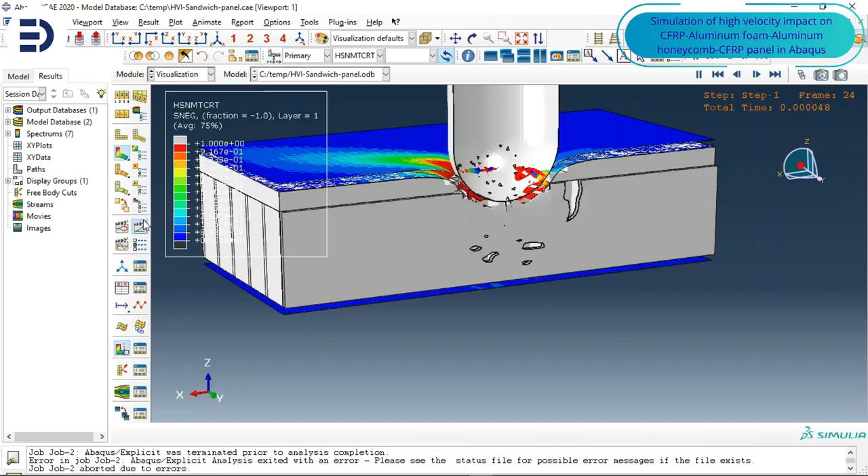Composite materials are engineered materials made from two or more distinct constituents, typically a reinforcing phase—fibers or particulates—embedded within a matrix phase, which can be polymer, metal, or ceramic. The goal is to combine the strengths of each phase to achieve superior mechanical, thermal, and durability properties that cannot be obtained by the individual components alone.

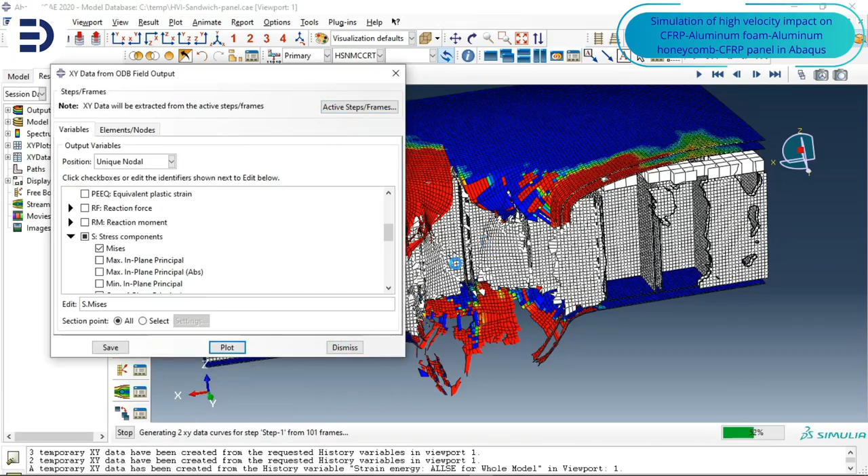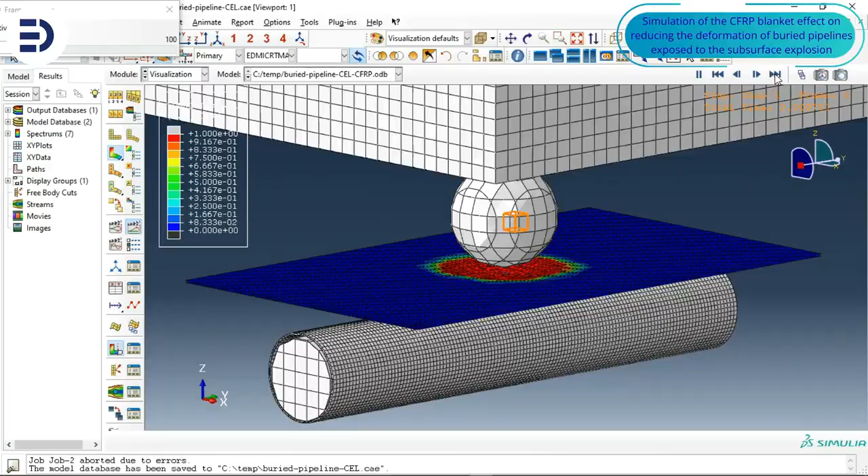Fiber-reinforced polymer (FRP) composites are the most commonly used class in industries like aerospace, automotive, civil engineering, sports equipment, energy, and marine structures. FRPs encompass a broad family of advanced materials distinguished by the type of reinforcing fiber embedded within a polymer matrix, most commonly epoxy.

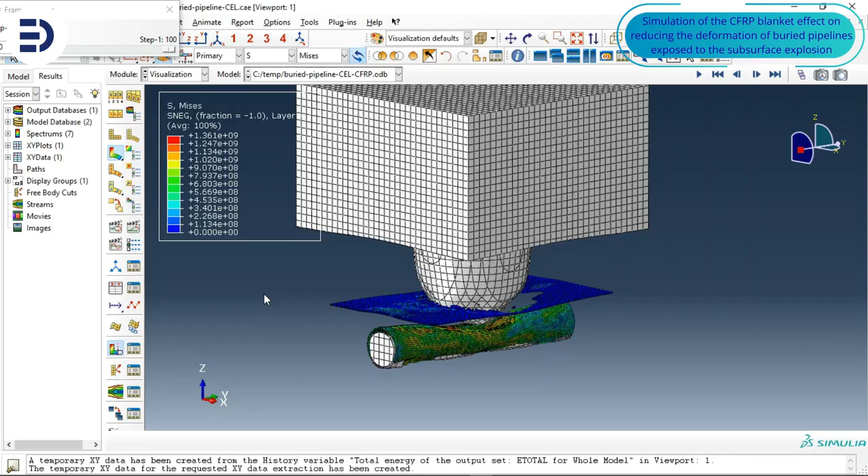Carbon fiber-reinforced polymers are characterized by their exceptional strength-to-weight and stiffness-to-weight ratios, making them indispensable in high-performance and weight-critical applications such as aerospace structures, satellites, advanced automotive components, and sporting equipment, where durability and fatigue resistance are essential.

Aramid fiber-reinforced polymers, utilizing fibers such as Kevlar or Twaron, are valued for their outstanding impact resistance, toughness, and energy-absorbing capability, which makes them particularly suitable for ballistic protection, helmets, and other safety-critical structures.

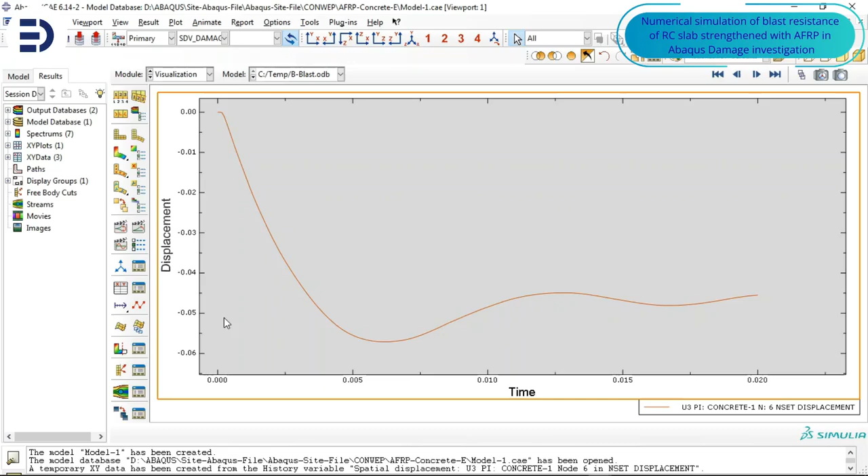Glass fiber-reinforced polymers represent one of the most widely used FRPs due to their balanced mechanical performance, corrosion resistance, and relatively low cost, leading to extensive use in wind turbine blades, marine vessels, construction reinforcement, and automotive parts.

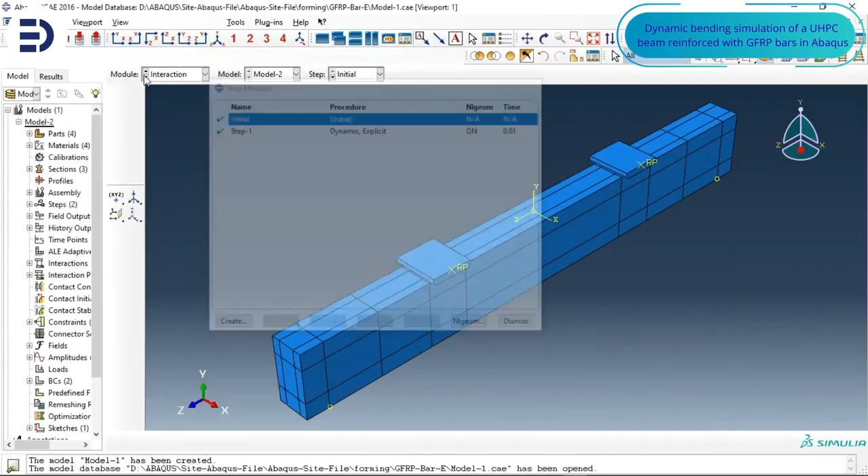Basalt fiber-reinforced polymers, derived from naturally occurring volcanic rock, offer improved temperature stability and chemical resistance compared to traditional glass fibers, supporting their application in marine environments, fire-resistant components, and structural reinforcements such as rebars.

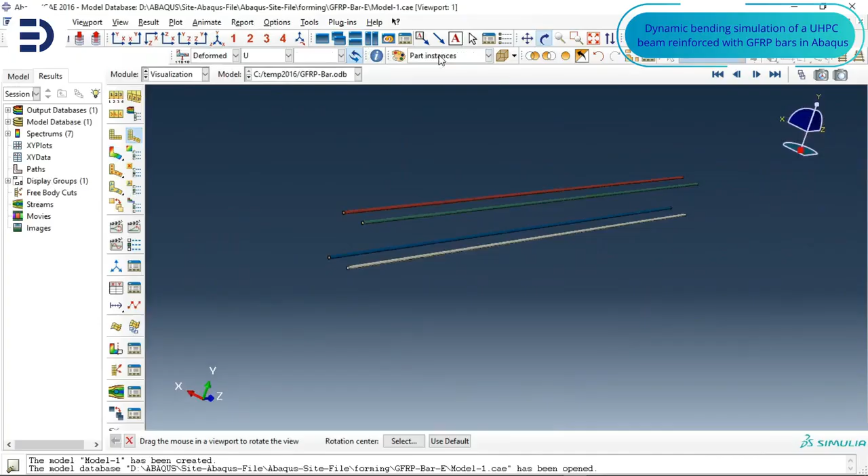In contrast, natural fiber-reinforced polymers employ plant-based fibers such as jute, hemp, flax, or bamboo, providing environmentally friendly, lightweight, and cost-effective alternatives with moderate mechanical properties, increasingly adopted in automotive interiors, packaging, and consumer products where sustainability is a key consideration.

Composite materials are anisotropic, meaning their properties vary with direction. Unlike metals with uniform properties, fiber orientation and stacking sequence play crucial roles.

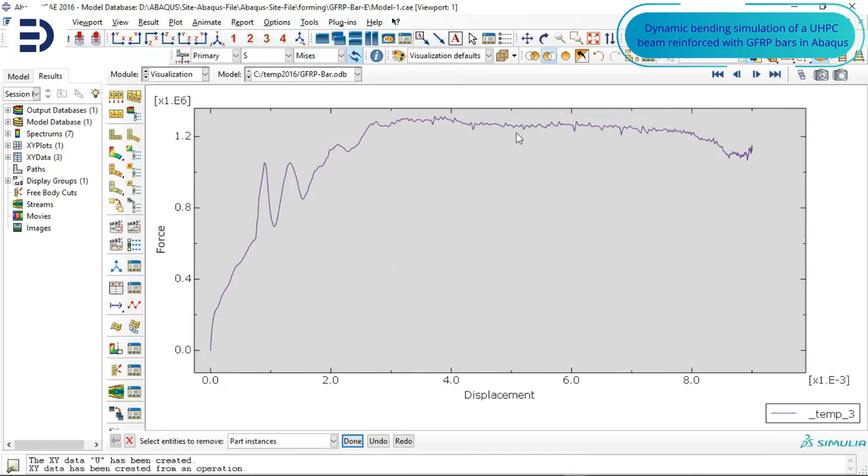Key mechanical concepts are longitudinal modulus along the fibers, transverse modulus perpendicular to fibers, shear modulus, Poisson's ratios, strength in different directions, and failure modes such as fiber breakage, matrix cracking, and delamination. Classical laminate theory (CLT) is commonly used to predict behavior.

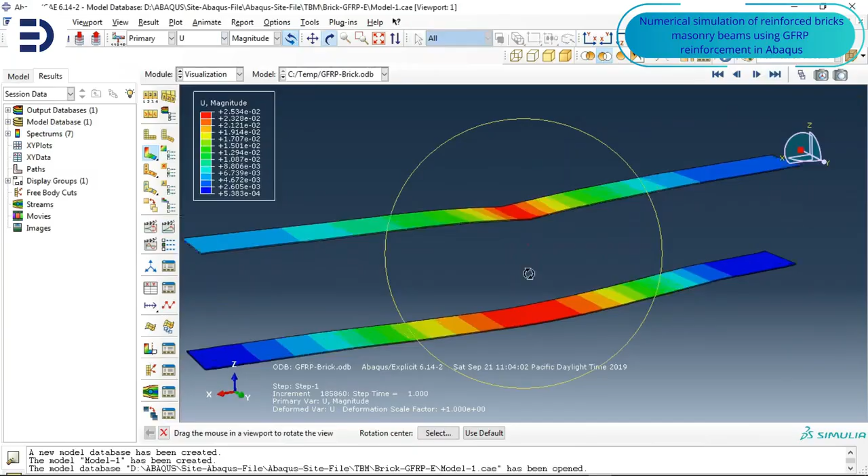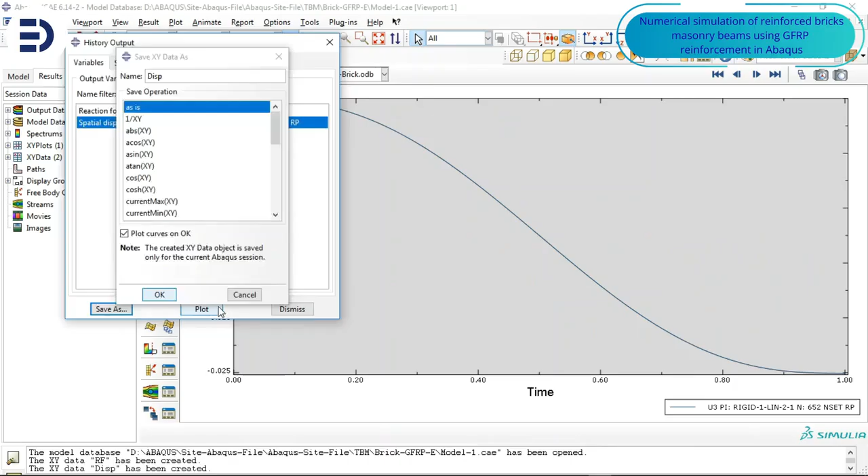Composite analysis methods include micromechanical analysis, used to predict the properties of a single-ply lamina based on fiber volume fraction and fiber and matrix properties, using concepts such as the rule of mixtures, Halpin-Tsai equations, and the Mori-Tanaka model.

Macromechanical analysis focuses on laminates composed of many stacked plies, using classical laminate theory (CLT) to predict in-plane stiffness via the ABD matrix, bending/twisting coupling, and laminate strength and failure.

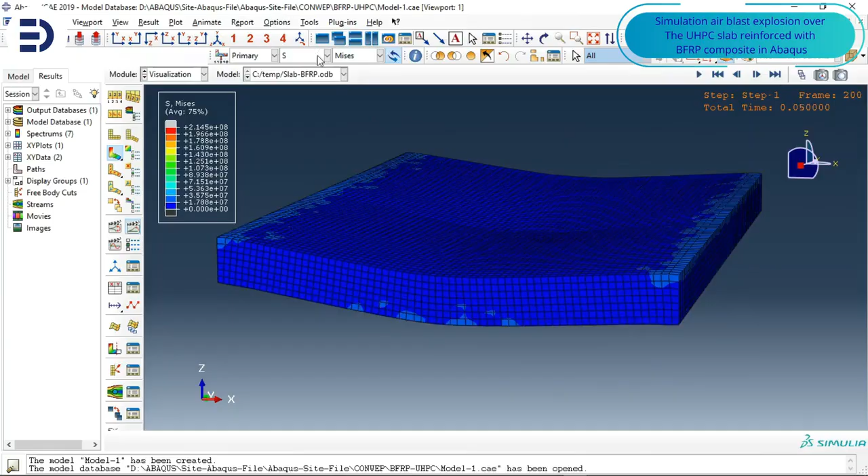Common failure criteria are maximum stress and strain, Tsai-Hill, Tsai-Wu, Hashin failure criteria for fiber and matrix separately, and Puck failure theory for interfiber failure.

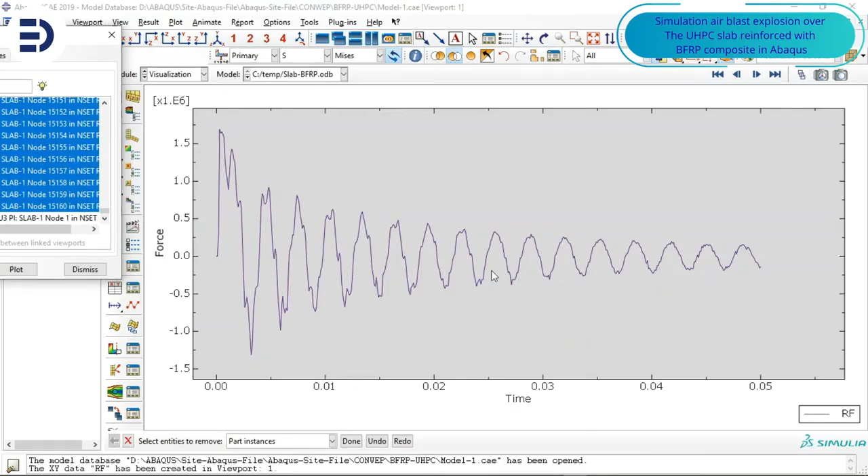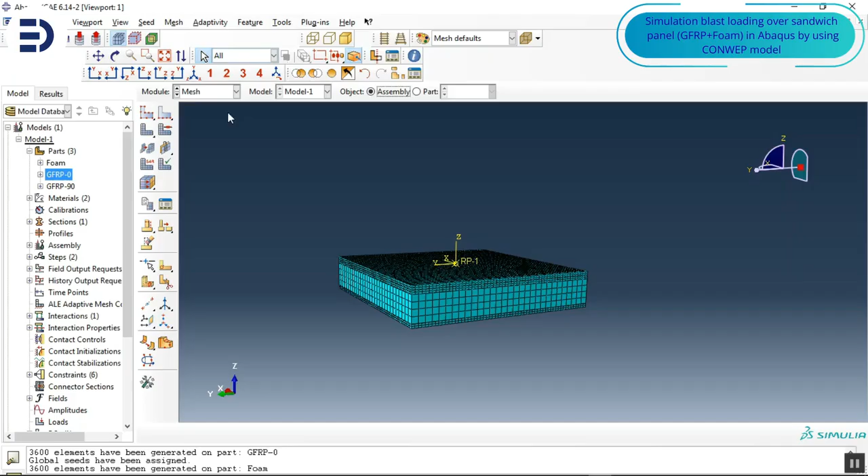Composite simulation uses numerical methods to predict mechanical performance, stress distribution, damage initiation and propagation, curing behavior, and manufacturing process effects. Numerical methods include the Finite Element Method (FEM), the most widely used; the Finite Volume Method (FVM), sometimes used for fluid-structure or thermal analysis; and mesh-free methods, which are less common.

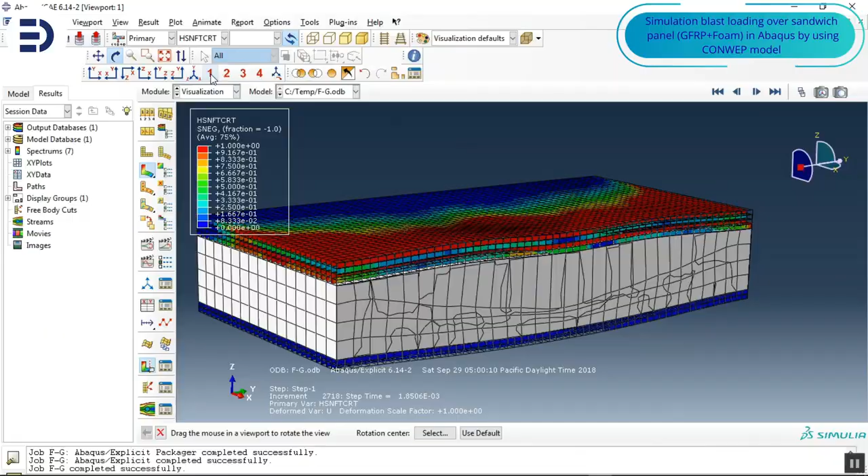Popular composite simulation tools are ANSYS Composite PrepPost (ACP) and Abaqus with composite layup modules. Functions include ply stacking design, defect and delamination modeling, progressive damage modeling (PDM), impact simulation, and fatigue prediction.

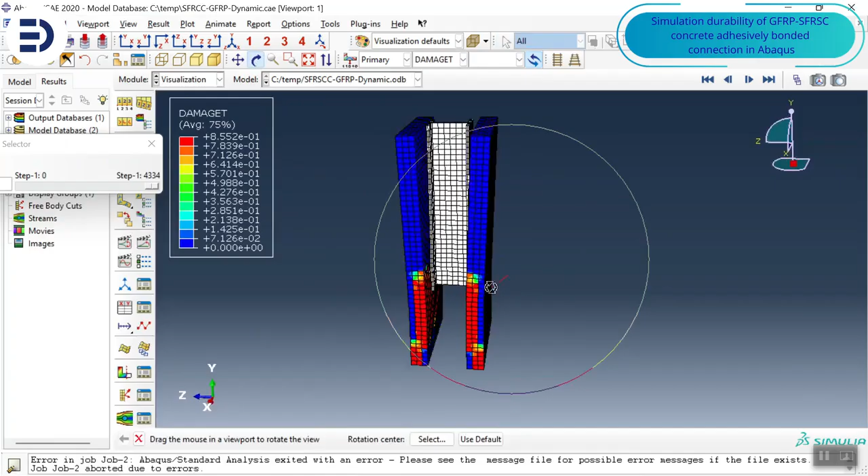Manufacturing processes significantly influence composite performance. Key processes are hand layup, vacuum-assisted resin transfer molding (VARTM), resin infusion, autoclave curing, compression molding, filament winding, and pultrusion. Simulation can predict fiber waviness, void formation, residual stresses, cure shrinkage, and thermal gradients.

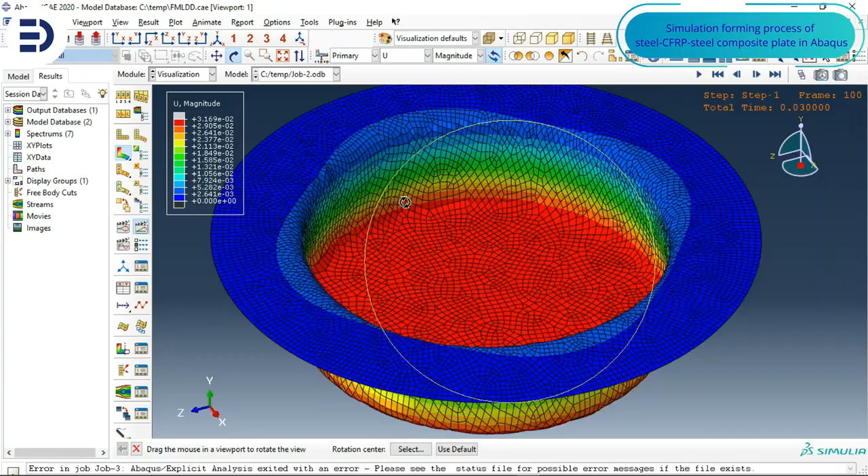Challenges in composite analysis include strong anisotropy, nonlinear behavior under high loads, sensitivity to defects such as voids and delaminations, time-dependent properties in viscoelastic matrices, complex failure mechanisms, and computational modeling complexity.

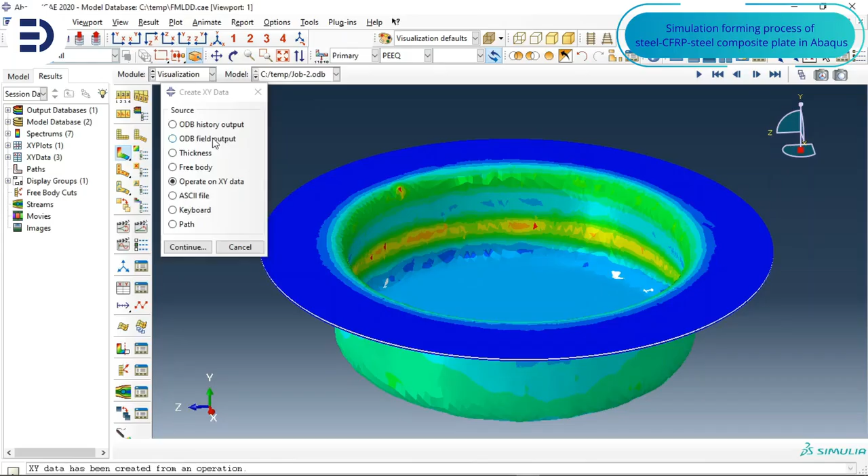Composite materials are used in aerospace for wings, fuselage, and control surfaces; in automotive for crash structures and body panels; in civil engineering for FRP rebars and strengthening of bridges; in energy for wind turbine blades; in marine for boat hulls and propeller blades; and in sports for bicycles, tennis rackets, and fishing rods.

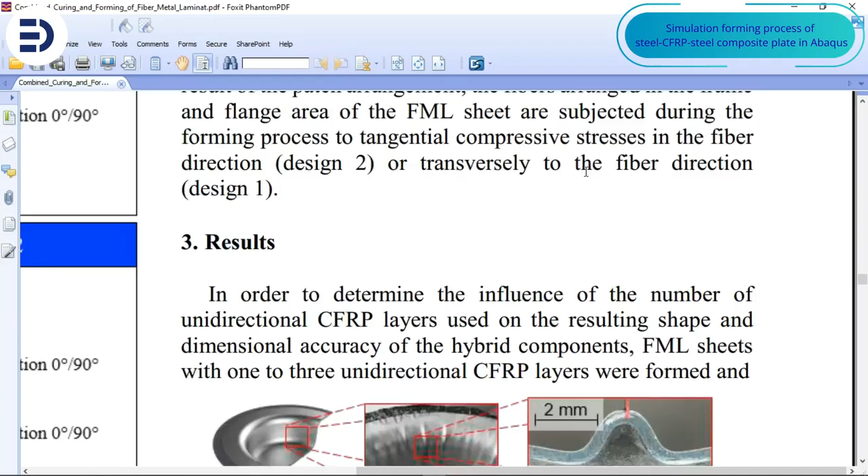Composite material analysis and simulation is a multidisciplinary field combining materials science, mechanics, micromechanics, continuum modeling, and numerical simulation. Understanding how fibers, matrices, orientations, and manufacturing processes interact is key to designing high-performance, lightweight, and durable structures.

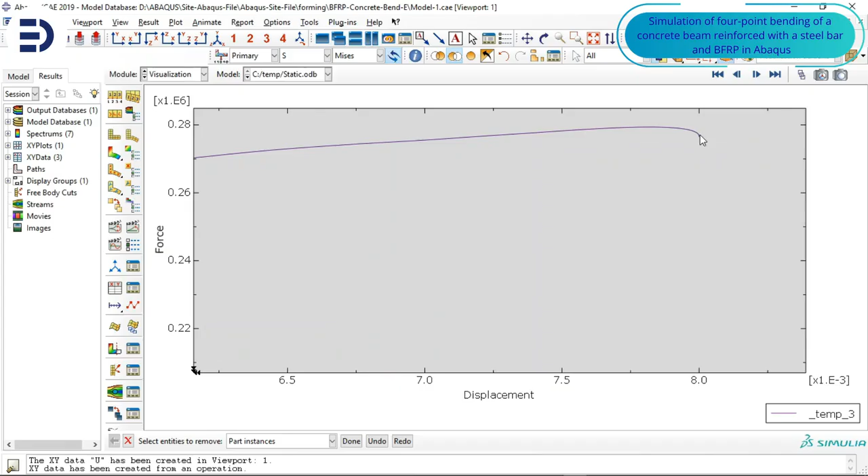In this comprehensive course, you will explore the fundamentals and advanced concepts of composite material analysis and simulation using Abaqus software. Through 27 detailed, hands-on tutorials, you will gain both theoretical understanding and practical simulation experience. Each tutorial includes a step-by-step video, Abaqus model files, codes, and a relevant research paper to support your learning.

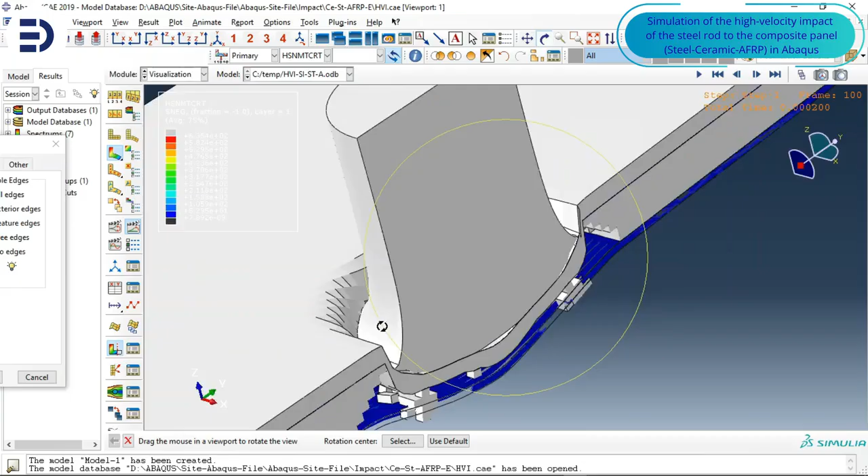The course covers a wide range of engineering applications, including analysis of CFRP, GFRP, BFRP, AFRP, jute-epoxy, banana fiber, green composite, and bamboo fiber, as well as high-velocity impact on CFRP sandwich panels.

Topics also include CFRP, BFRP, and GFRP as reinforcements; forming processes of composite materials; air blast analysis; analysis of composite materials under various loading conditions; low energy impact analysis; and 3- and 4-point bending tests.

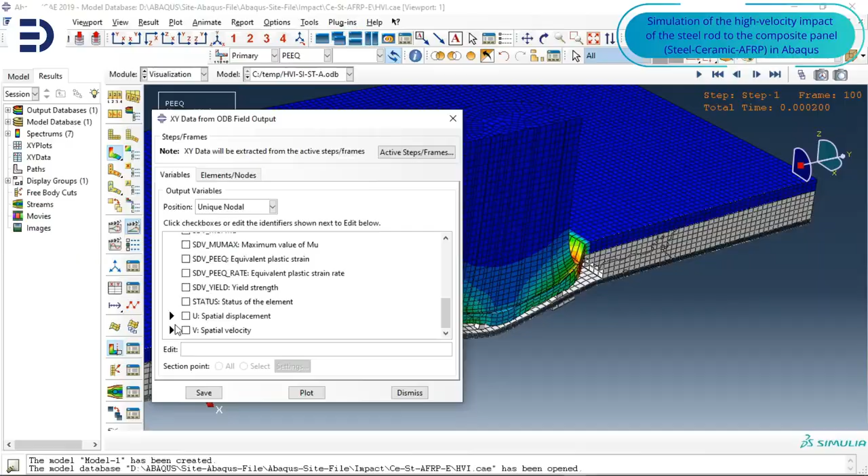Additional topics include durability analysis, compression and tension tests, simulation of composite pipes, and armor modeling and analysis. FEM provides a powerful and flexible framework for realistically analyzing and simulating composite structures.

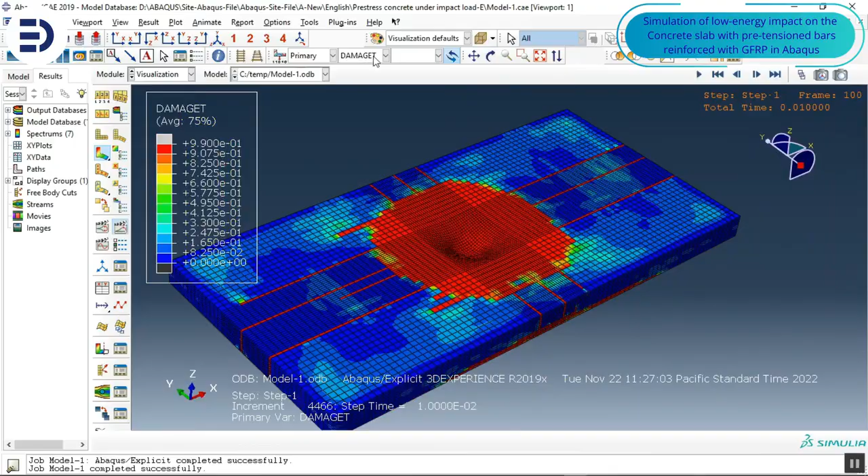By capturing material nonlinearity, cracking behavior, and complex geometries, engineers can predict performance, optimize design, and ensure safety and reliability. This package is ideal for mechanical, aerospace, composite engineering, and civil students and researchers.